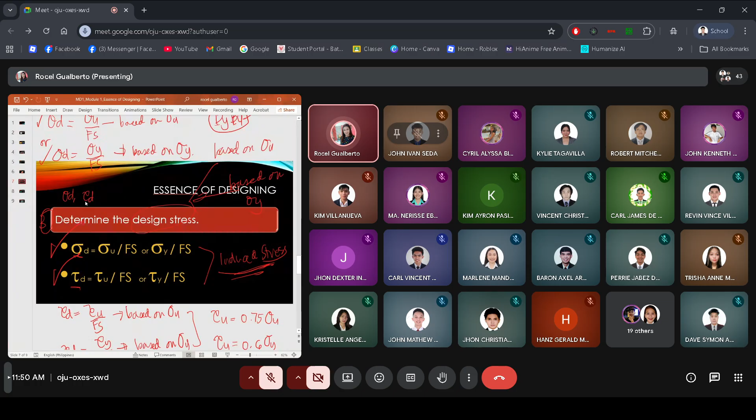Okay? So, dito daw tayo natapos. Okay? So, for the design stress, we have the sigma D and yung tau D. Okay? So, we use these two symbols to mean the design stress. When you say sigma D, this is design stress. And kapag tau D, you include only shear. So, ang tawag doon ay shear design stress or design stress in shear. So, how do you obtain the values of sigma D and tau D? That is based on yung basis ng design. Okay? So, depende sa basis ng design.

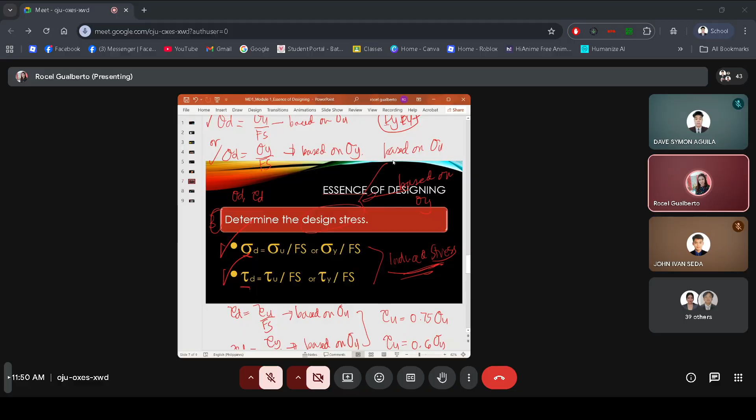If you have there, based on ultimate strength, then the equation for sigma D would be sigma U divided by the factor of safety. Likewise, kung yan naman ay tau D, and based on the ultimate strength, then that becomes tau U over Fs. Kung base naman po sa yield strength, then sigma D is equal to sigma Y over factor of safety. And in terms of tau, that would be tau Y, okay, divided by the factor of safety. That is based on sigma Y.

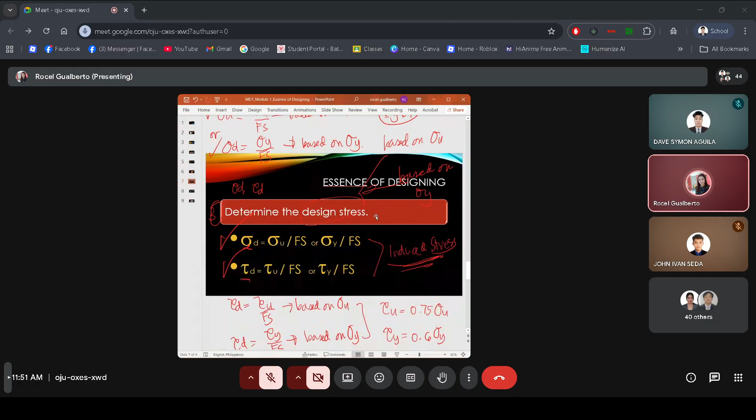Now, question now is, how would you know if you will be using sigma or itong set ng tau? Okay? Paano malalaman kung sigma ba or tau yung gagamitin? It is dependent on the induced stress of the material. Okay? So, titingnan mo ngayon ano yung induced stress ng material. Induced stress meaning yun yung stress na caused by the load na naka-apply doon sa material. Okay? So, doon mo malalaman kung sigma or tau yung gagamitin. Okay? So, later, I will be showing to you the induced stresses.

Okay? Now, how would you obtain the value? How would you solve for the design stress? Considering these equations, sigma u over Fs or sigma y over factor of safety. So, sigma u and sigma y, these are taken from our design tables. Kailangan lang ay alam natin kung ano ang material na given. Okay? So, para makuha mo yung value ng sigma u at sigma y. Tapos, okay, yung factor of safety naman, yun naman po ay base din sa table natin, table 1.1 to be exact. Okay? What about din sa tau?

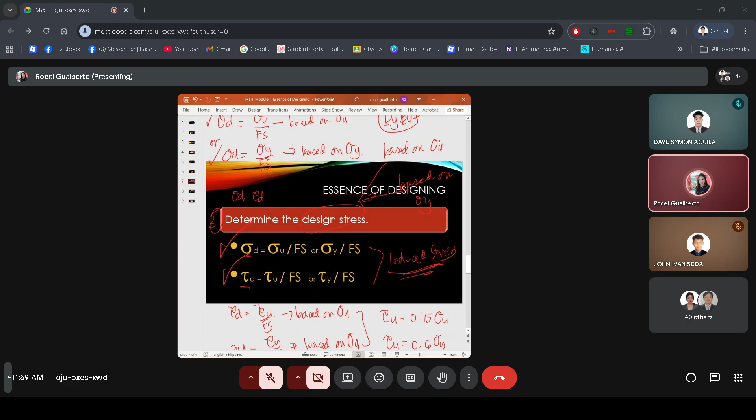If this is the axial stress, we said sigma is the axial stress, so what you equate it to in design stress should also be in the form of sigma. They should match. That's the question from earlier - when do I use sigma, ma'am, and when do I use tau? And the answer is, it is dependent on the induced stress.

So here it is. We equate them. If this is sigma, this is sigma, so sigma D is what you use. For shear, you have the symbol tau, so our design stress should be tau D. For torsion, the same - this is tau, so tau D is used as the design stress. For flexural, you have your sigma sub F to be equated to your design stress in the form of sigma.

So that's how we equate them - this is the design stress and this is the induced stress. All of them are like that. This is our equal sign: design stress equal to the induced stresses. So that's our four essences of designing.

Again, we start with material specification as to the code and as to the strength. Next, you need to apply a suitable factor of safety. Third is for you to determine the design stress. And this is the fourth - for a good design, you equate the design stress with the induced stress of the material. So that's the essence of designing, and that will guide us also in solving the problems here in design.

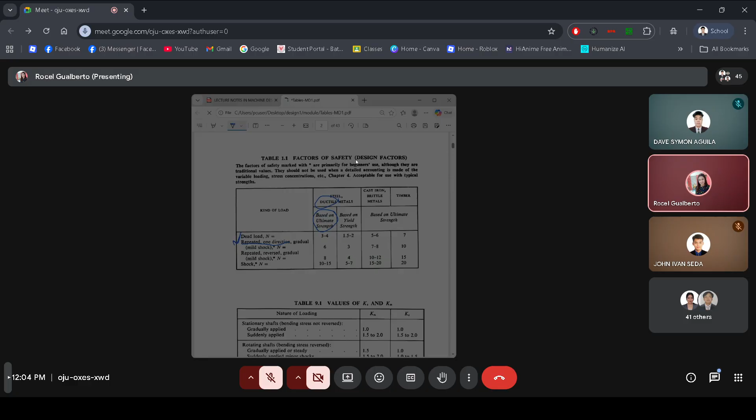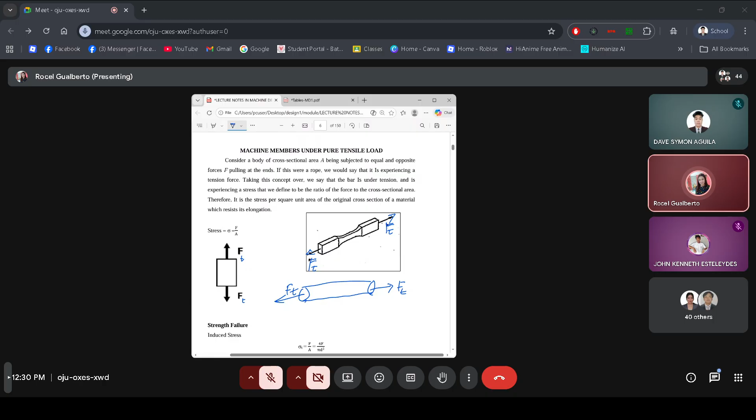The first is what we call the strength failure. So we design the machine member based on the strength failure, considering the induced stress of the material. What is the induced stress of the material? We call it the tensile stress. A member applied with this force will be under a tensile stress. This tensile stress, from our earlier presentation, is a kind of axial stress.

So what is our equation for this tensile stress? The tensile stress is simply equal to the force divided by the area.

So you will be using here the tensile force divided by the area. And if you have a circular cross-section, then this would be equal to what? Ano yung magiging value ng ating sigma t? That would be Ft divided by the area, which is the area of the circular cross-section, pi d squared over 4. So ito po ang ating sigma sub t, that is your tensile stress.

Yun yung induced stress natin. So anong gagawin natin para ma-design yung member considering this induced stress? Sa essence ng designing natin, sabi natin, for a good design, you need to equate the design stress with the induced stress of the material.

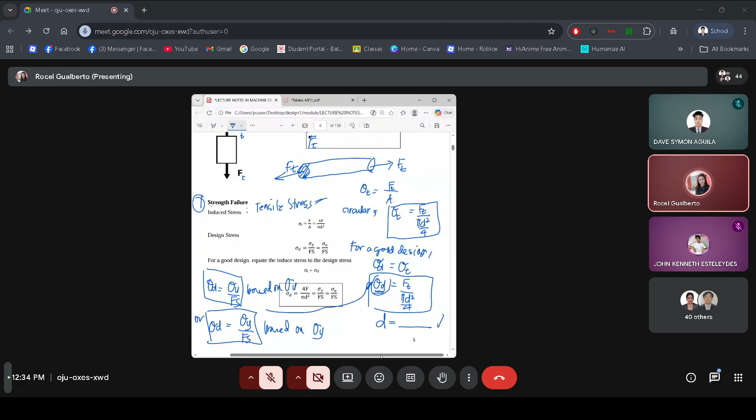And then another one is, meron tayong tinatawag na deformation failure. Bakit naman po may deformation failure? So a member, kapag po hinila mo po yan, you apply a tensile load sa kanya, ang tendency niya is to elongate. So ang deformation po natin dito is called an elongation. Humahaba po yung machine member natin, so may nadagdag na length po.

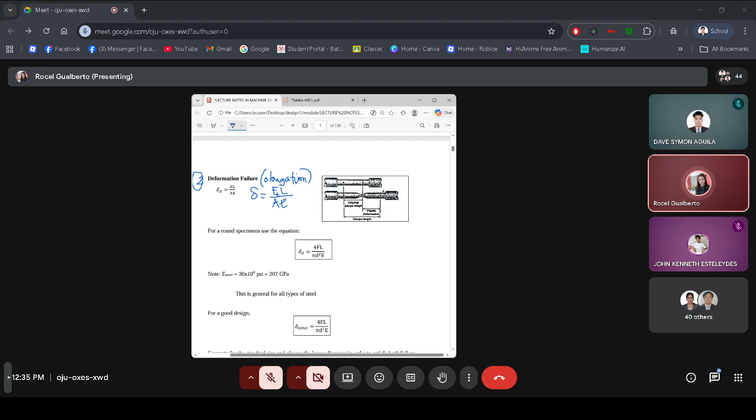And how do you compute for the deformation? You have this symbol as the deformation, that is simply equal to FL over AE. This is the tensile load, L pertains to the original length, A is the cross-section, and E is the modulus of elasticity. Again, if you have a circular cross-section, the deformation would be equal to Ft times L over pi d squared over 4, multiplied by E. So yan po yung elongation ng member.

Ang gagawin lang po natin sa design, i-equate po ulit natin. Paano natin siya i-design? You equate that to what we call allowable limit of deformation. Equate mo ngayon dun sa deformation ito, which is equal to Ft L over area pi d squared over 4 multiplied by E, equal to the allowable limit.

Yung limit po na yon is given, same thing with Ft, yung length, yung E. So again, you can solve for another dimension, you can solve for another diameter. Saan ang galing ang sagot na yon? Base sa deformation. Yung sagot kanina ay base sa strength ng material.

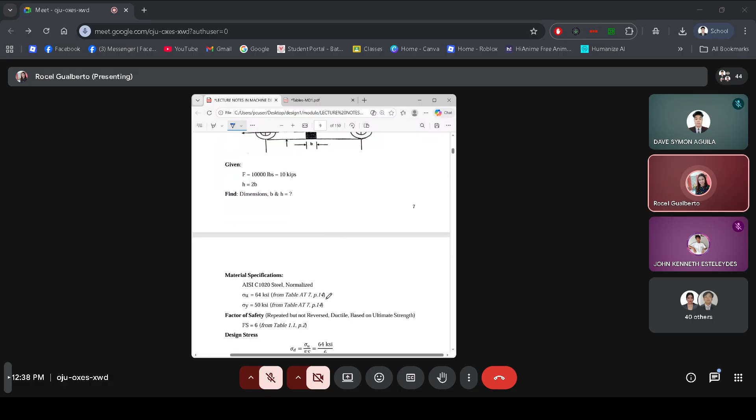So, ang tawag ay allowable limit of deformation, at ginagamit natin siya dito. Now, pag ang isang design problem ay walang binigay na allowable limit of deformation, katulad ng pinakita ko sa inyo kanina, ibig sabihin wala din itong entire solution for the deformation. Kasi wala kang allowable limit of deformation, so basically ang magiging sagot mo lamang ay galing dito sa strength failure. Iisa lang yung naging sagot mo.

Pero kapag halimbawa may ibinigay na limit of deformation, laging dalawa yung magiging sagot mo. Isa ay galing sa strength, ang isa ay galing dito sa deformation. Sana ay maliwanag po yun, dalawa po yung makukuha natin.

Okay, so for the equation here, sabi ko nga Ft, length, they are usually given. Pero pagdating sa E, yun po is the modulus of elasticity. Saan mo po kukuhanin ang modulus of elasticity? Doon po yun nakukuha, doon sa particular material na given sa problem, you try to look at its value of E, the modulus of elasticity.

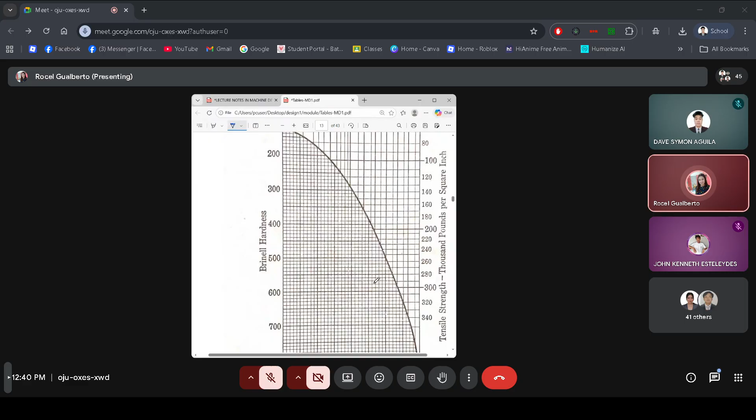Halimbawa, 10, 20 as rolled, so table AT 7. Dun ka ngayon sa hanay, dun mismo sa row. O, halimbawa, yan, 10, 20 as rolled, ito po yun. Titingnan mo ngayon dun muna sa hanay na yan, is there a value of E, the modulus of elasticity. In this case, wala pong value ng E dito, kahit saan dyan wala dyang value ng E.

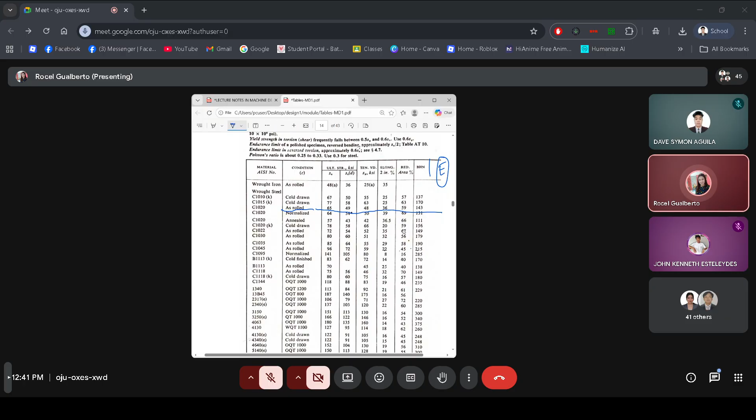So ano po yung gagawin? Kung wala na po doon sa row niya, pupunta ka ngayon sa heading. Doon mo makikita yung mga values ng modulus of elasticity. So in particular, nandun po yun: Modulus of elasticity in tension or compression, E is equal to 30 times 10 to the 6 PSI. You may convert this into KSI, hindi yan mo po kukuhanin.

Okay, so dalawa na po. Una, dito sa kanyang particular row. Pag wala pa rin, punta tayo dun sa itaas, para makuha natin yung exact na value ng sigma U at saka sigma Y. Now, for the values of E sa row, sa heading, ano pa po yung isa? Pag wala sa row, wala pa din sa heading, assume to use this value. Bakit mo gagamitin ang value na ito? E equal to 30 times 10 to the 6 PSI or 207 gigapascal, ito ay general for all types of steel.

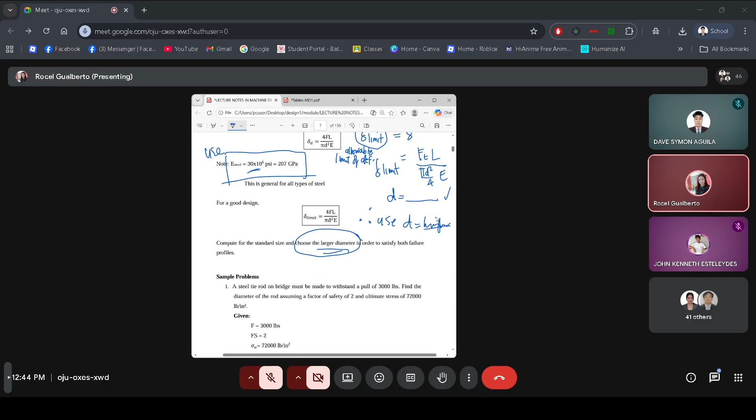Now, there are cases na wala pong allowable limit of deformation. So pag wala po ito, no deformation failure, ang magiging sagot lang natin ay galing lang dito sa strength failure lang, and that would be final already. Hindi katulad na pag magkakasama silang ganito. So ang titingnan mo is yung diameter or dimension nila, ganun po yung gagawin natin.

Question? Okay, may tanong po ba? Maliwanag?

Okay, so ganun po natin siya i-design. So palagi, parte ng solution mo is the conclusion. Failure to include yung conclusion na yun ay mali po yung answer natin.

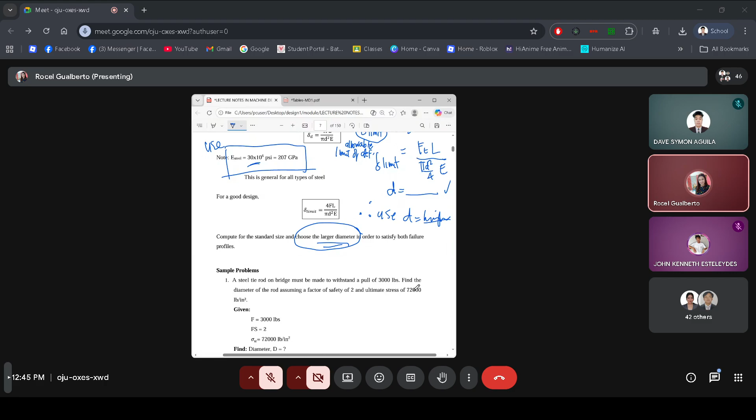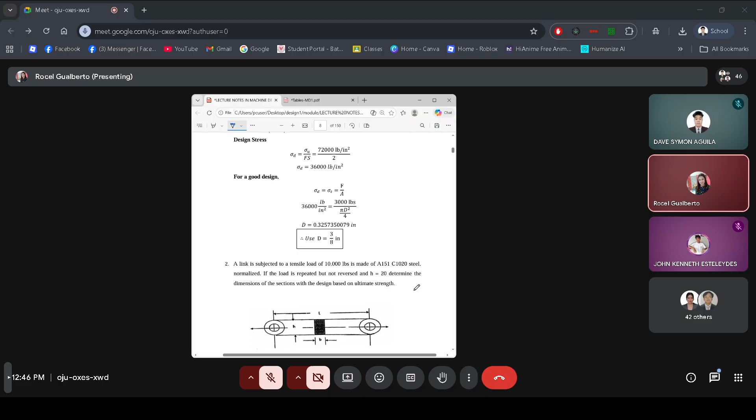Okay, let us have a sample problem. This is problem 2. The link is subjected to a tensile load. This is our tensile load. This link has a rectangular cross-section with dimension B and H. So this is what we need to find: what should be the value of B and what is the value of H.

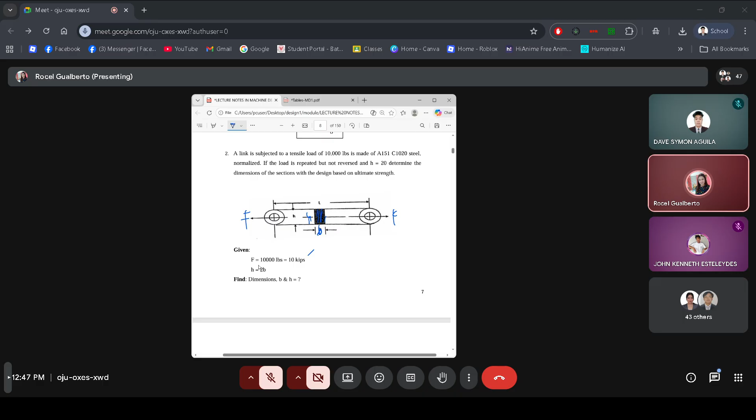We solve this problem considering our essence of design. You start with the given values. You have the force, 10,000 pounds equivalent to 10 kips. And then you're given the relationship of H equal to 2B. So you are to find the dimensions B and H.

If we follow the procedure of our essence of designing, first you have the material specification, sigma U and sigma Y values. C1020 steel, normalized, sigma U is 64, sigma Y is equal to 50. And then you have the reference table. Please check it in our tables.

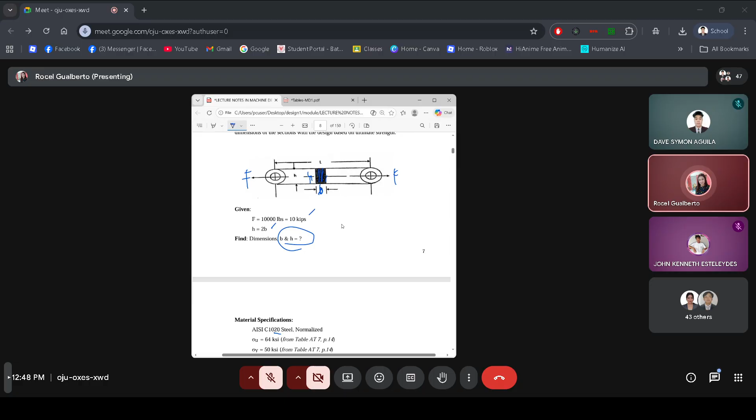Next is to apply a suitable factor of safety. This depends on the kind of load. Go back to the problem. What does it say about the kind of load? The load is repeated but not reversed, so that's what we use. What type of material? This is C1020, so it's ductile. And then the basis of design - how would you know the basis of design? Read the problem again, it says the design is based on ultimate strength. So the design stress should be based on the ultimate strength, same with the factor of safety. Considering these three: repeated but not reversed load, ductile, and based on ultimate strength, you go to your table 1.1 and see the value of factor of safety.

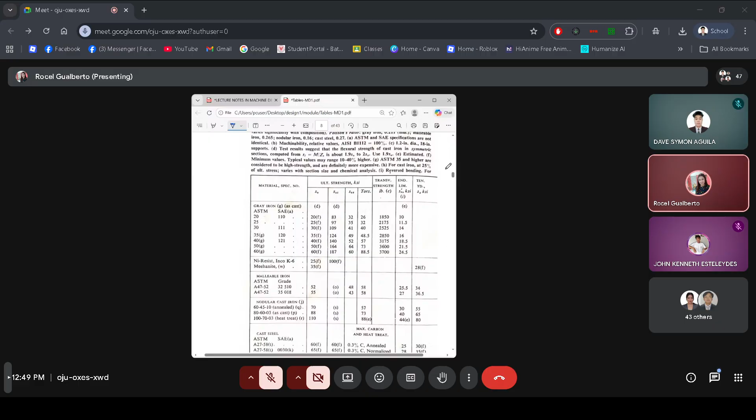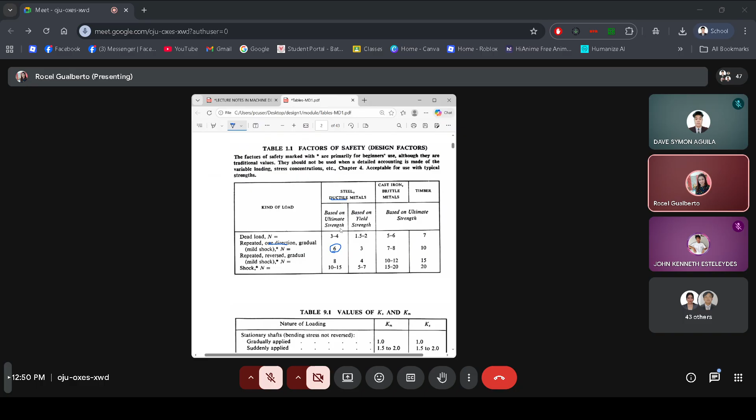There it is, table 1.1. What does it say about the kind of load? Repeated, okay, but not reversed. In the table you won't totally find repeated but not reversed, so you contextualize it as the same as repeated one direction. If it's one direction, it's not reversed. Type of material is ductile, and the basis of design is based on ultimate strength - that's the requirement. So the value is equal to 6. That's what we'll use. So this is correct: FS is equal to 6, taken from table 1.1.

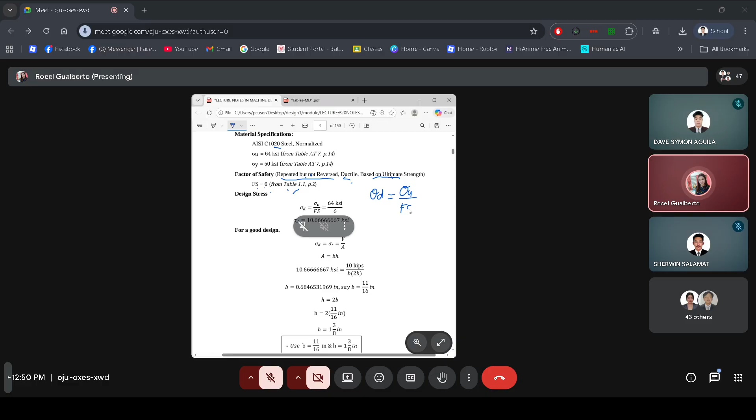And then we go to the design stress. You are to determine the design stress. For the design stress, which one will we use - sigma U or sigma Y? Sigma U, ma'am. Sigma U. So you will be using sigma U over factor of safety. Why did we use sigma U? Because that's indicated as the basis of design based on ultimate strength. So, this is taken from the table, and the factor of safety also. We have 64 KSI divided by 6, that will give us 10.667 KSI. So that is our value. This is our design stress.

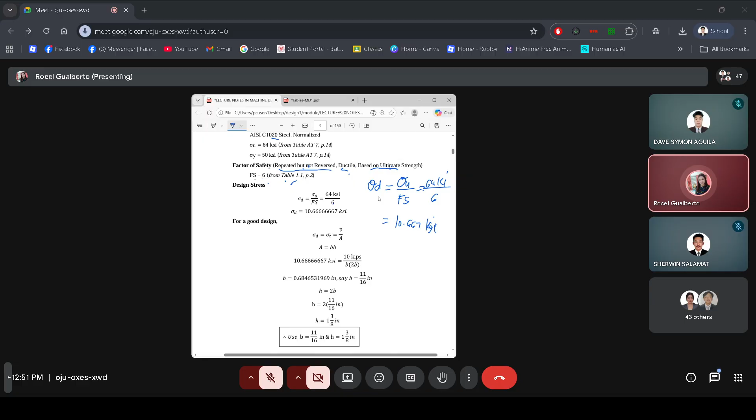And then we go to the fourth one: for a good design, equate the design stress to the induced stress. So that's what's done here. Design stress equals the induced stress. Here, you are to equate the design stress with the induced stress. So sigma D is equal to the induced stress, equal to the tensile stress, which would be force divided by area.

From this area, you can compute the answer. So for our area, that's what we substitute, because we have a rectangular cross-section. For rectangular, it's B times H. So that's what we substitute. So your sigma D is equal to force over B times H. And there is a relationship between B and H: H is equal to 2B. So this becomes F over B times 2B, which is 2B squared, equal to your sigma D. So that's our sigma D from earlier, 10.667 KSI. The FT value will just be substituted, then you come up with the value of B.

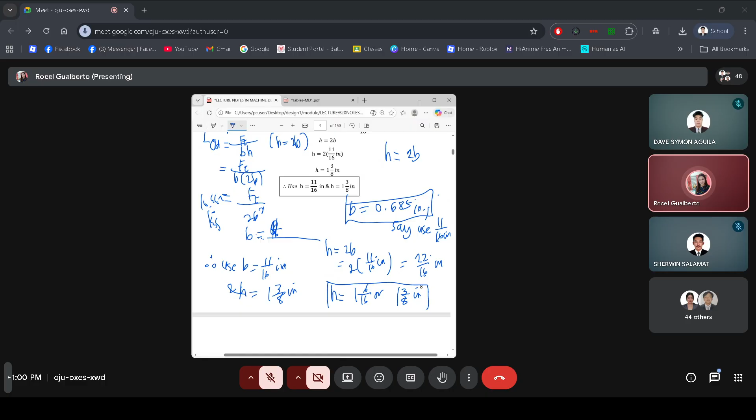Dapat lagi tayong may conclusion. So doon sa design work natin, try solving po yung letter C. As your assignment, try to solve Problem 1, letter C only, for presentation on our next meeting. Ang Problem 1, yung letter C lang. Huwag mong pansinin yung A and B. Yung letter C lang, it involves both deformation failure and strength failure.

Deformation kasi may allowable limit. Sa strength failure naman, ano ang magiging basis of design nito? Sa letter C, walang binanggit na basis of design, kaya ang susundin ay yung type ng material. Since AISI 1045, ductile yun, so dapat based sa yield. Dalawa ang sagot natin: isa sa strength based on the yield, at isa sa deformation. Then try to compare the two, whichever is higher, that would be your final answer.